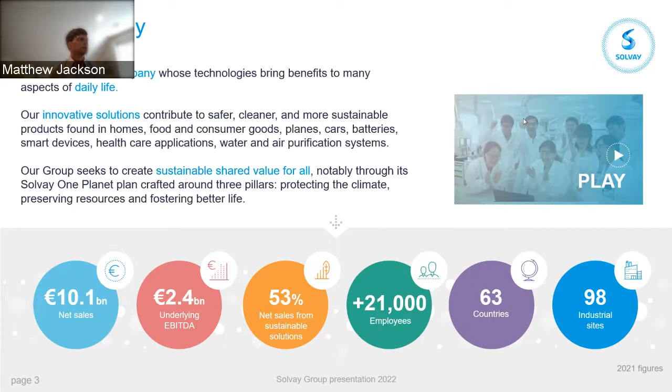And then, what are some of the areas that we're interested in? Solvay as a company, we're interested in aligning ourselves with a lot of the trends that are driving global interest. So things like electrification, lightweighting, resource efficiency. Solvay in itself has a lot of different material businesses and segments. Today, we're looking at composites specifically.

Our composites specifically help enable electrification, as the weight you add to a structure increases significantly when you add batteries. So lightweighting becomes really important and actually goes hand in hand with electrification. Then there's resource efficiency, which is driving our interest and focus as we develop composite materials. How can we develop materials that are more sustainable, that use less energy to manufacture, and down the road use less energy in the actual lifespan of the material?

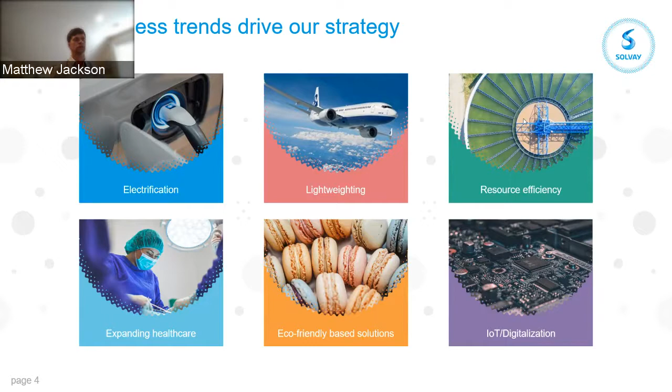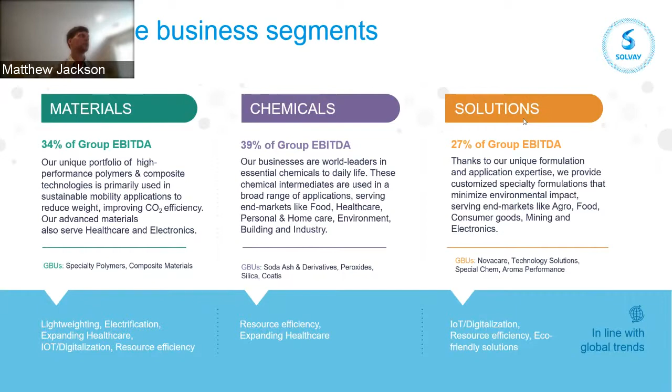So again, the three business segments of Solvay: we have the materials segment, which is where we are with composite materials, the chemical group, and the solution group. I'm not going to talk about the other two today, but it's really about a third, a third, and a third of the different segments. I'm going to talk primarily about the materials group today, which is around 34% of our group EBITDA. Within the materials group, we have our specialty polymers and our composite materials.

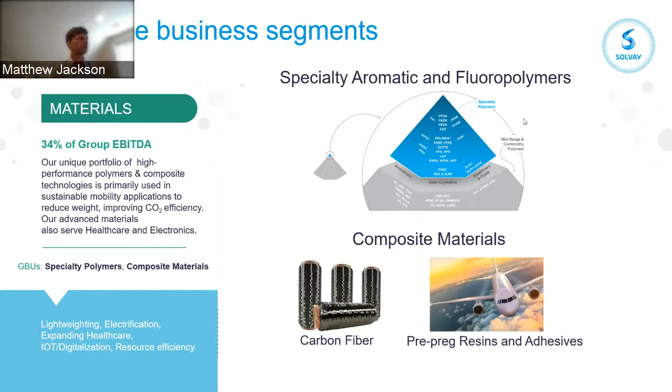The focus for Solvay in particular is on high performance. For both our specialty polymers and composite materials, we tend to sit at the top of the performance pyramid. The top image shows some of the polymers we make in our specialty polymers portfolio, things like highly aromatic polymers such as PEEK, PEKK, and PPS. We also have a wide portfolio of fluorinated polymers and fluorinated materials. So specialty polymers sit at the top of the performance pyramid. And with composites, they also tend to sit at the top of the performance pyramid when we look at just structural materials. Those two businesses make up our materials segment for Solvay.

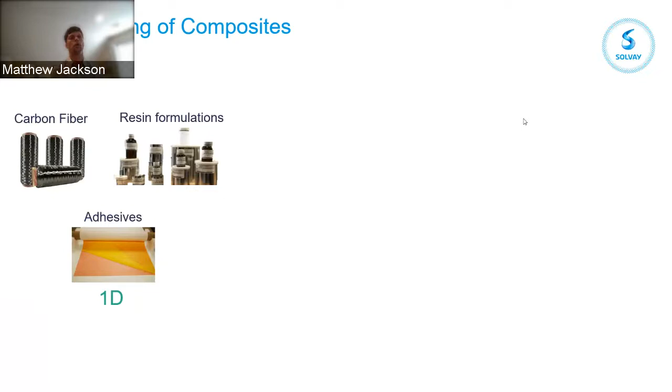I'm going to get into a couple different areas of composite manufacturing today. But I just want to touch on and show that manufacturing of composites covers many different areas. The first is the one-dimensional product form, things like the carbon fiber or reinforcement itself, and then the polymers and adhesives that go to hold the carbon fiber together to give it structure.

We also then have the manufacturing of what we call the prepreg, which is an impregnated carbon fiber. We take the polymers, the resins, and combine them in different ways to create this two-dimensional structure we call prepreg, which then goes to our manufacturers.

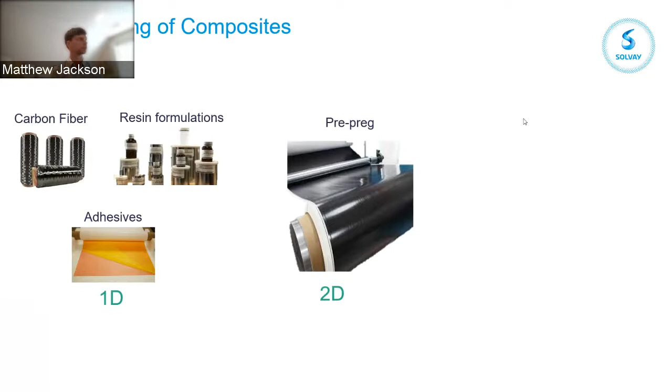And then finally, there's the manufacturing of the parts. The parts take a three-dimensional form and tend to carry load. So there's manufacturing at each stage: manufacturing of the individual constituents, manufacturing of the quote-unquote composite where we bring the constituents together, and manufacturing of the part. Today's talk will touch on manufacturing at each of these stages - not a deep dive into any one in particular, but showing how we go from manufacturing the constituents all the way to manufacturing the part.

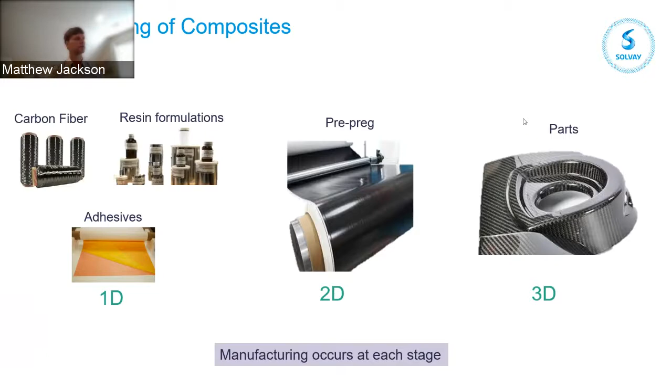Before we get too far along, I did want to define what a composite is. The word composite is fairly generic - it can mean made up of several different constituents or components. We're interested mostly in an aerospace definition. From aerospace, we're talking about a reinforcement fiber combined with a polymer matrix, looking to maximize performance.

Carbon fiber was actually first invented in 1879, so a long time ago, but wasn't actually commercialized until 1959. So when we talk about carbon fiber structures and the legacy and experience with using these materials as structural materials, it actually isn't that long. If you compare it to metals, carbon fibers and their composites are relatively new on the scene when we look at them for structural materials.

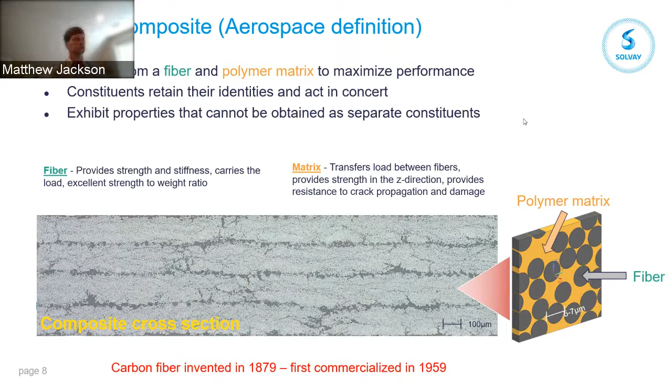When we talk about a structural composite, we're talking about how to combine the fiber and resin to maximize performance. What's really important is to get the ratio of fiber and resin correct. Ideally, if you want to maximize performance, you want as much fiber volume as possible. But that often comes at the sacrifice of manufacturing and processability. We need a system without voids, where the polymer can infiltrate and help transfer load without acting as a defect. So there's generally a balance, and we tend to target around 50 to 60% volume fraction of carbon fiber to get the best balance of properties.

If you look at the generic stress-strain curve of the different constituents, you can see the fiber, the reinforcement, has really high modulus and really high strength. The polymer resin, which goes around that, tends to have a much lower modulus and a much lower strength. Ideally, we want to combine these two in a form which maximizes the performance of the structure.

There are different ways to do that. We can have the fibers run all in one direction - we call this a unidirectional system. You get a lot of strength in the direction of the fibers, but you tend to be pretty weak in directions that are perpendicular or orthogonal to the fibers.

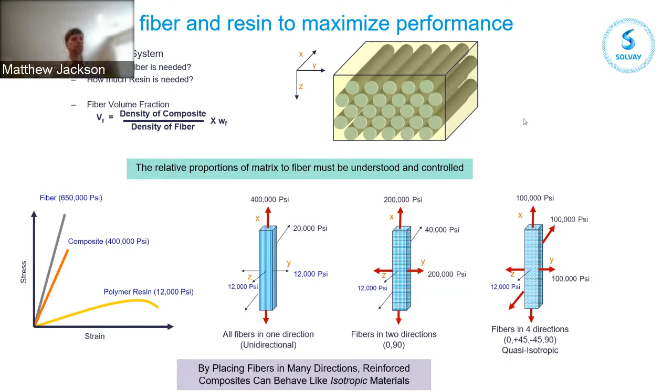Generally, what we do with composite materials is try to get into what we call a quasi-isotropic or isotropic-like material. Ultimately, we want to maximize performance in every direction, and we do that with this quasi-isotropic layup - having fiber in as many directions as possible. You see we've again sacrificed performance in the X direction, but now we've given it strength and stiffness in both the X and Y directions.

When we design an aerospace composite, we take this building block approach. If we start with a single lamina, shown on the left, that's a single layer of unidirectional carbon fiber with the matrix. We then build up structures to give it both a Z direction dimension and stiffness and strength in multiple directions. This gets into some of the nomenclature we use.

We call a single ply with all the fibers running in one direction a lamina. Once we start stacking these lamina together, we get what we call a laminate. In the center, we're showing a 6-ply unidirectional laminate. Here we have strength and stiffness really in one direction, the direction of the fibers, but not much in the transverse or shear directions.

To overcome this, what we tend to do are again these quasi-isotropic laminates. One thing I'll point out is we try to have a balanced layup - by balanced, I mean there's going to be symmetry. If you look at the orientation of the plies on the right-hand image, we go from 0, minus 45, plus 45, to 90, then 90, plus 45, minus 45, and 0. So we have a mirror plane in the middle.

That's to try to create as balanced a layup as possible and to maximize performance in every direction. So the fibers give us strength really in one direction, and we try to balance that out by creating these quasi-isotropic laminates, which gives us multiple directions of performance.

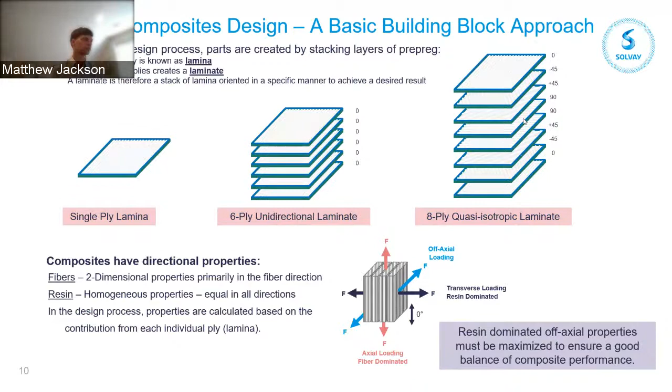Really the idea is to identify where the loads are, how the loads travel, and try to align the carbon fiber such that it follows the load path as best as possible. A lot of times the actual geometry and the load that the structure is under dictates the layup, dictates the angles, and dictates the number of plies that we see in a structure.

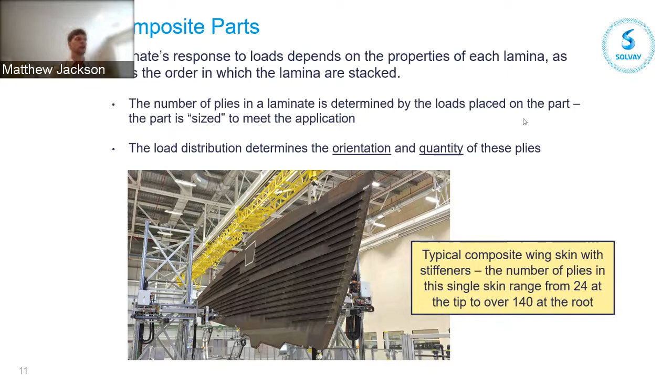Getting a little more into the basics - when we talk about a composite structure, we're talking about a fiber reinforced polymer, and the fiber is really what gives it its strength and stiffness.

If you look at different reinforcing fibers, there are a lot that are used. Glass fiber and carbon fiber are the two most prevalent, by volume or by mass. When we talk about carbon fibers, we're typically talking about PAN-based or polyacrylonitrile-based carbon fibers. The reason is because they give the highest strength and modulus combination and a fairly low density. If we look at the density compared to glass fiber, our density is quite a bit lower and our strength is quite a bit higher.

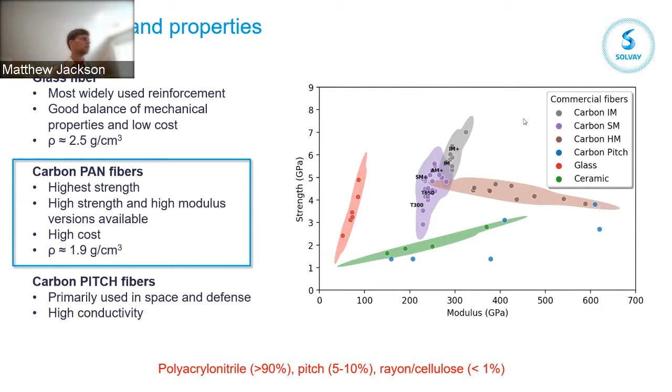Within the carbon fiber realm, there are different types of carbon fiber. There's the PAN-based, which I just mentioned, then there's also pitch-based carbon fibers, and you also see a little bit of these rayon and cellulose type fibers. Even within these domains, PAN-based carbon fibers make up over 90% of all carbon fibers used. Pitch, rayon, and cellulose have niche areas, but for the most part, polyacrylonitrile-based carbon fibers are the bulk of the carbon fiber composites used today.

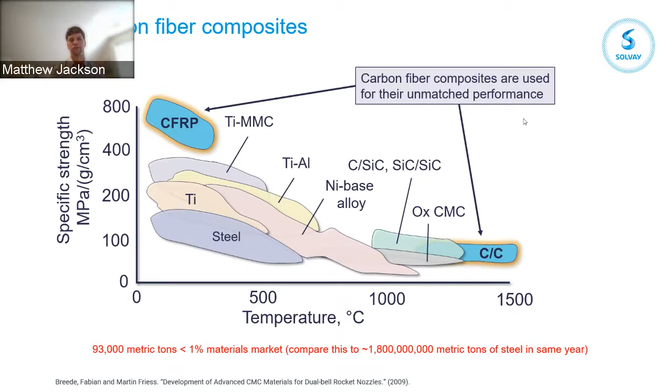So why are composites used? We talked a little bit about the main pros so far. The structural performance you get from these materials is very high, and the weight savings you get. The strength per mass, or strength per density, is really the highest of any commercial material that we have now.

There's some other advantages too. There's fatigue resistance from these materials that you don't get in metals, and there's a lot of corrosion resistance. This is why it's found a home mainly in the aerospace world. Things like fatigue and corrosion are really important, and composites offer some inherent advantages there.

There are some disadvantages though of composite materials, and they are prevalent. One of the big disadvantages is cost. Carbon fiber materials are inherently expensive, and it's not only the cost of the material itself, but also the cost of manufacturing with this material. The manufacturing process is unique and sometimes cumbersome, so manufacturability becomes a challenge with composite materials as well.

Things like repairability are a market that isn't as mature as metals. If there is damage, is it something that can be repaired easily and effectively? There's a big area of research right now in the repairability of composites, but it's still considered more or less a disadvantage until the technology matures a little bit further.

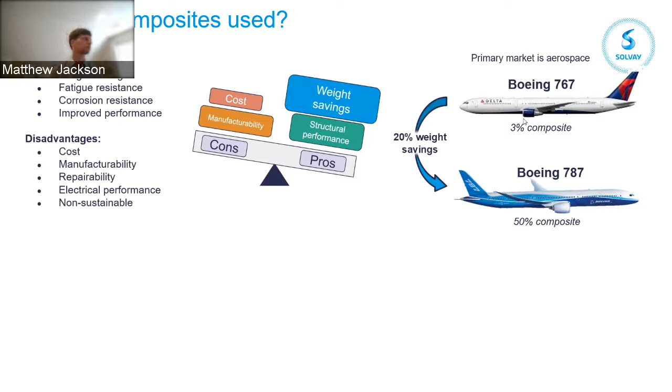So where else are composites used? It really found its home in aerospace, and that's where a lot of this technology was developed. But there's a lot of areas now where it's being explored and applied just because of its advantages in weight savings and structural performance.

Urban air mobility is one of the most obvious—things like air taxis and drones, vehicles that are small, lightweight, and mobile that fly. If you're carrying cargo or people, structural performance and weight is really critical for these structures, especially if they're going to be electrified. If we're adding batteries to these structures, which inherently have a lot of weight and mass, composite materials for the structural components make a lot of sense, and a lot of times are what actually enables this technology to be developed.

Wind energy is also another big area. As these wind blades get bigger and bigger, the structural requirements for the blades and for the materials themselves become higher and higher. A lot of blades have been made with glass fibers in the past, but now as these things get bigger and the loads on them higher, carbon fiber is becoming the preferred material for these wind blades.

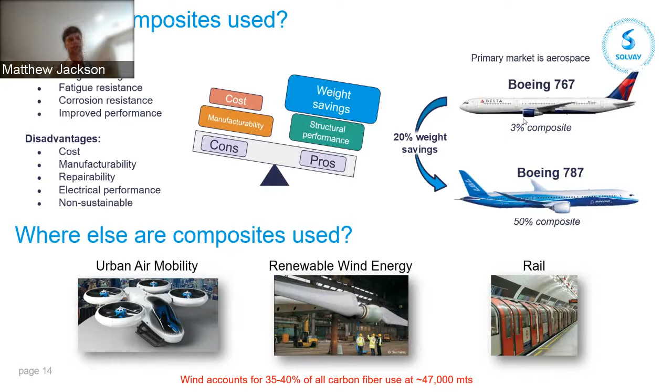And then finally, rail. Rail has a lot of the same advantages as the other transport mechanisms—really, you just need less energy if you have less mass. A lot of the rail structure now is being explored to be composite, just for energy savings and efficiency reasons. At the end of the day, wind still dominates carbon fiber usage—that's the biggest market by volume, and it's looking to grow, but some of these other areas are looking to grow substantially in the future as well.

So I'm going to talk a little bit now—we're starting to get into the manufacturing, and I'm going to talk about the manufacturing of the carbon fiber itself, because it's the most important component in the composite, as that's what gives it its unique properties. I mentioned before there are a couple different carbon fiber types: there's pitch, there's rayon and cellulose, but pan-based makes over 90% of all carbon fiber used. So I'm just going to walk through the pan-based carbon fiber manufacturing method.

It's a fairly complex process. If you've ever had the privilege to walk through a carbon fiber manufacturing line, it's quite impressive how big these are. If you ever get a chance, I'd recommend you take the opportunity to do it.

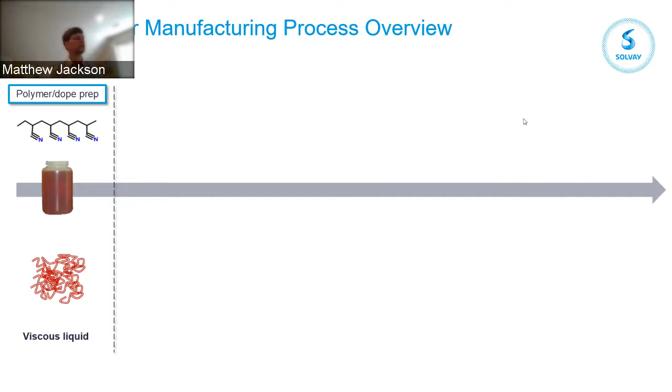But really, we start by making a polymer. So we start at the simplest stage, even before what I show on the screen here, with acrylonitrile, which is the monomer. We polymerize the acrylonitrile into polyacrylonitrile, and then we dissolve it in a solvent. When we dissolve it, we call this system a dope—it's a polymer dissolved, and it kind of looks like a honey texture. At this point, we have really a viscous liquid.

We take the viscous liquid and perform a process we call spinning. You basically take the viscous liquid and force it through tiny holes, tiny little spinnerets, to create fiber that we see here, called white fiber. Once we get to the white fiber stage, we wash out and remove all of the solvent, and we get to just polymer. At this stage, we start to develop some crystalline structure within the material. We do stretch it to give it some mechanical performance and properties. This is really what we call, and people refer to as, the precursor.

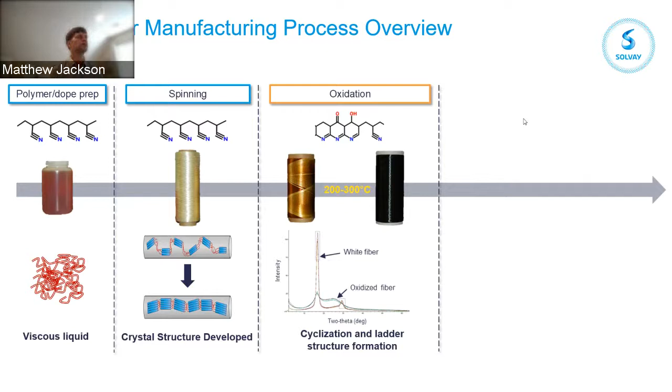After we have the white fiber, it goes through a stage we refer to as oxidation or stabilization. Up to this point, we haven't done much chemistry on the polyacrylonitrile, but now we start to do chemistry on the backbone. This is the most important part, the stabilization or oxidation stage. It allows us to cross-link the structure, giving it some mechanical integrity, but also thermal integrity. Ultimately, we want to take it where we drive off the heteroatoms, to carbonization, but in order to do that, we have to cross-link the system first so it doesn't melt.

Pan is unique in that the temperature at which these cyclization or cross-linking reactions happen is lower than the melting point. A lot of polymers, even those with high aromatic or carbon content, have the fatal flaw of melting before these reactions occur. If you have a fiber under tension that melts in your oven, you no longer have a continuous fiber. So pan is really unique in that sense, and it's why, even though it was developed around 50 years ago, it's still the primary and prevalent technology used for carbon fiber development today.

You can start to see some of the color change—this is associated with the chemistry we're doing on the structure. We go from the white fiber to a kind of golden orange fiber, all the way to black fiber once it's done through the oxidation phase. At the bottom, you can see some of the structure we're starting to develop, going from just aligning the crystals within the pan to actually forming cross-links, developing some early cyclization and some later structure formation in the fiber.

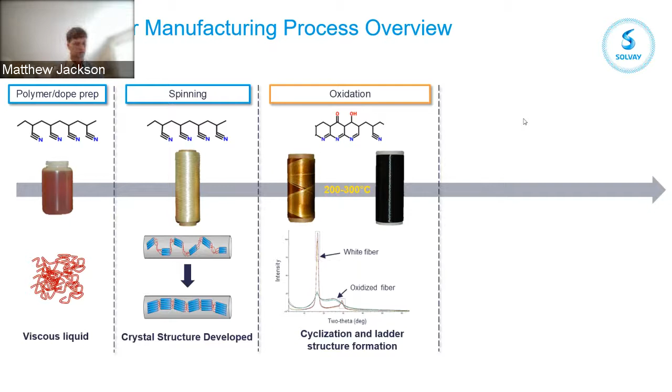The last stage then is to drive it to the carbon fiber. We define carbon fiber as having more than 93% carbon, and at this stage we're really trying to drive off all, or most, of the heteroatoms. We'll still have some residual nitrogen and oxygen in the structure, but for the most part we drive those off as much as possible.

The temperature we go to in the carbonization really dictates how many of those heteroatoms remain. If we want to take that carbon structure to even higher percentages, we take it to a higher temperature, but a lot of times that comes at a sacrifice of strength. So there's really a balance between strength and modulus within this range, 1,000 to 2,000 degrees Celsius. Depending on the specific grade of carbon fiber you want, you'll heat it to different temperatures and stretch it to different degrees.

At the end of the day, we end up with a structure that has some amorphous carbon content and some crystalline content, and we can vary that ratio depending on the type of properties we want to target.

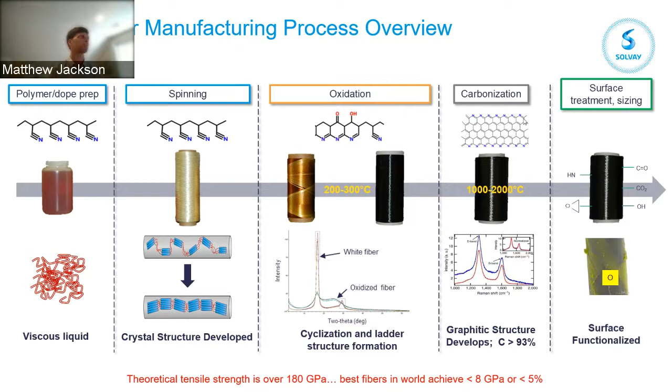In order to get into a product form that we can send to our customers, we have to decide what to do with the carbon fiber itself. There are two ways you can really align the carbon fiber. The first I'm going to talk about is the fabric form, which is what most people associate with carbon fiber.

If you looked at something like a carbon fiber hood or a carbon fiber bike, a lot of times this fabric form and geometry is shown off, and that's what people associate with it. There are some advantages of fabric form. To get the fabric form, we basically take it through a weaving process, typical to what you'd see with other fibers and fabrics. But the advantage of fabric is mostly in the drapeability - it allows you to conform the material to fairly complex shapes depending on the part you want to manufacture.

It also has structural efficiency - one ply inherently has fibers running in multiple directions, so there's less effort to balance out the fiber direction because it's just inherent in the fabric form. It's also a fairly cost-effective manufacturing process, partly due to this efficiency. If it's a manual process you're using to make your composite part, there are fewer plies, fewer layers you have to lay down.

There are some disadvantages with the fabric form though, and the biggest is the property knockdown you see with the fiber. Inherently, each carbon fiber tow is going over other carbon fiber tows in the other direction, which creates this fiber crimp in the structure. If you're looking at absolute top-level performance, you can imagine as you put that crimp under either tensile or compressive load, it's not as structurally sound as a unidirectional fiber, which is really a simple beam - you do get a knockdown of properties.

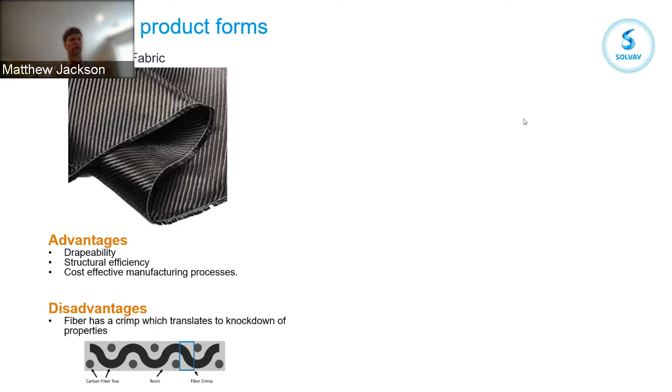Contrast that with the unidirectional product form. This is where the fibers run all in one direction. I talked early on about how we can start to balance the properties, right? So we take these layups and we can rotate the angles of the fibers to give us strength and stiffness in different directions. The advantages of the unidirectional are the high structural properties. This is where we get the highest performance.

But it really comes with the disadvantages of, it's more laborious, more plies are required to get a balanced structure. Again, it takes more work, generally higher cost, which is associated with the higher labor. And then another disadvantage is really the shapes and the geometries that you can conform with the unidirectional. So it does not conform nearly as well as the fabric fiber form.

This works pretty well if you have a fairly flat panel or geometry. But if you had a curved shape like a radome, something like that, you tend to get wrinkles and crinkles, which then inherently jeopardize the high structural properties that you were going for in the first place. So each one has its benefits and disadvantages, and it really dictates on what is the part that you're trying to make, what is the manufacturing method that you're trying to use.

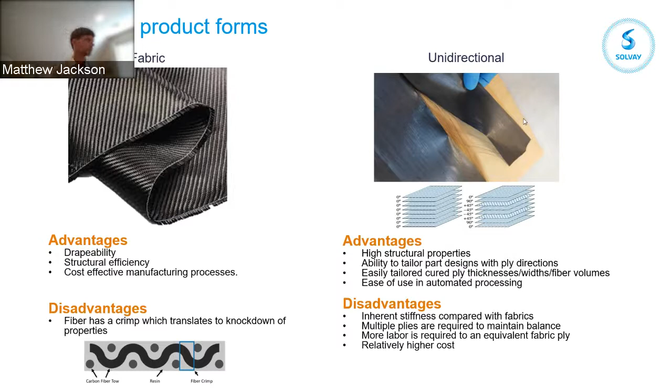So after the carbon fiber is manufactured, what we look to do is manufacture the prepreg, or the impregnated carbon fiber form. We can start with either the dry fabric, or we can start with the unidirectional fibers. For the unidirectional fibers, what we end up doing is taking many different tows or spools and lining them up next to each other. To create a prepreg, we might have anywhere between 50 to 200 spools being unspooled at one time to create a carbon fiber web.

We then take those and spread them out, and then add a polymer matrix to the fibers directly. This can be either a thermoset or thermoplastic matrix. This can be done using hot melt, or using a solvent bath, where we take the polymer of interest, dissolve it in a solvent, and then run the fibers through that. It can also be done with a slurry process, where we take the polymer and grind it up and basically deposit particles on the surface, which then get consolidated later.

There's many different ways to combine the materials, right? It depends on your input material form, whether it's fabric or unidirectional fiber. Then it depends on the type of polymer that you want to combine it with. At the end of the day, we end up with these prepreg forms, which then go to our customer. For Solvay materials, this is kind of our end product, these prepregs, but it is the building block and beginning for the part manufacturers who take the material and then create it into a part.

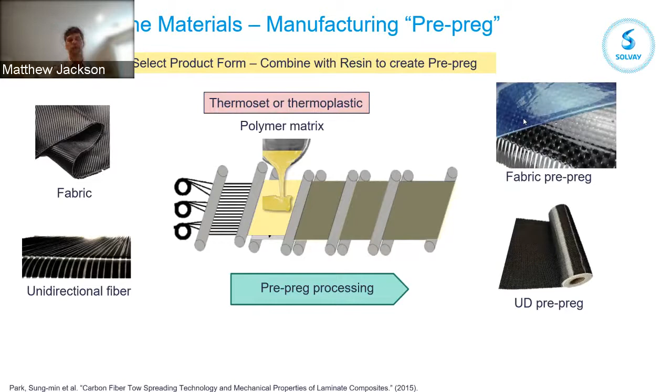The manufacturing of composite parts takes the material I just talked about and begins to conform it to different geometries and dimensions. This picture here is showing an automated process where we're taking the carbon fiber, highlighted in red, and draping it over a fuselage mold. This is actually done with unidirectional carbon fiber. You see the geometry has a slight contour, but not something so extreme where we would need fabric.

In aerospace, a lot of times we're looking for maximum performance, especially if it's something like a fuselage. So here we take the impregnated carbon fiber, and we lay it in different directions depending on the load paths that the material is going to see. We lay it down, or our customers lay it down, in the pre-impregnated form, before it's been cured, allowing it to conform to the geometry. Then they'll put it into an autoclave or an oven, run it through a temperature pressure cycle to cure and basically set up the geometry.

Composite parts are somewhat unique in the sense that the manufacturing of the part and the materials happen at the same time. It's not really a composite material until it's cured and the stiffness goes up and it retains its shape. So we make the part and the material really at the same time. Our job as a material supplier is to provide the material that allows them to do this.

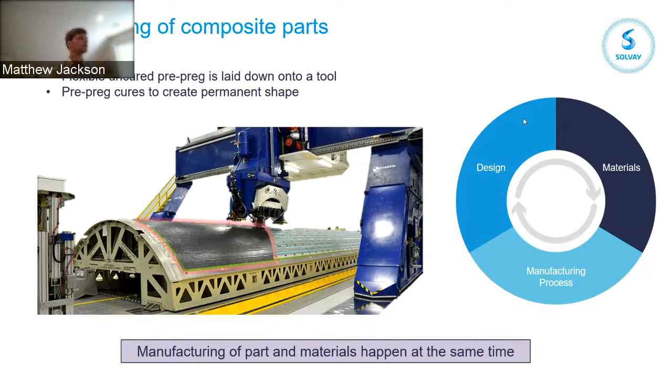So there are some effects of the prepreg manufacturing process on performance. Before, I talked about just the layup, so we can vary the angle of the composite lamina itself to give variety of strength and stiffness in different directions. But when we talk about the manufacturing of the prepreg itself, it can actually create some variability within the microstructure, which has effects on the performance.

The best case scenario is a completely consistent, homogeneous material, but that's sometimes hard to achieve. Depending on whether we do melt impregnation, whether we're using unidirectional versus fabric, whether we're using solvent impregnation, the rates and temperatures we use can change the variability we see within the fiber spacing in the composite.

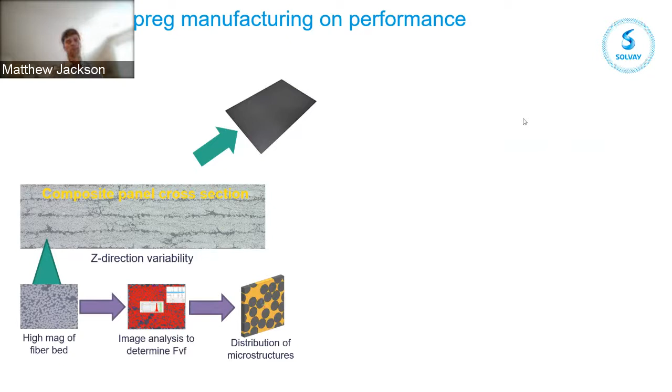We can also take a top-down look at the same material and get different information. Now we're not just looking at the spacing in the cross-section, but the actual distribution of angles that we see from the fibers, which are inherent to the manufacturing process. Each manufacturing process for the prepreg has a slightly different effect on this behavior. Now we're talking about distributions of fiber angles that vary from whatever angle we want to set it at.

If we're trying to target a 0-degree ply, the manufacturing method can have up to plus or minus 4-degree distribution of that fiber angle. So essentially, the manufacturing method can be chosen to try to minimize or expand that. A lot of times, if we're looking at low-cost manufacturing, high rate, the trade-off is higher variability, so we get a higher distribution of these fiber angles.

As we deviate more from 0, we tend to get a bigger hit in our properties. If we can go slow and steady, we can reduce this distribution, but a lot of times that comes at the sacrifice of a slower process and ultimately a higher cost material. So again, it's all a balance, but manufacturing at different stages of composites can have an effect on the property and behavior.

One of the things we can do to try to understand this is start to bring in simulation. This is showing how we can do coupon simulations where we take the information from the composite panel cross section to develop a distribution of microstructures. We can take the information from the distribution of fiber angles, showing how the manufacturing process disrupted us and pushed us away from this ideal state. So we can get this rotation of microstructures and start to run these predictive simulations.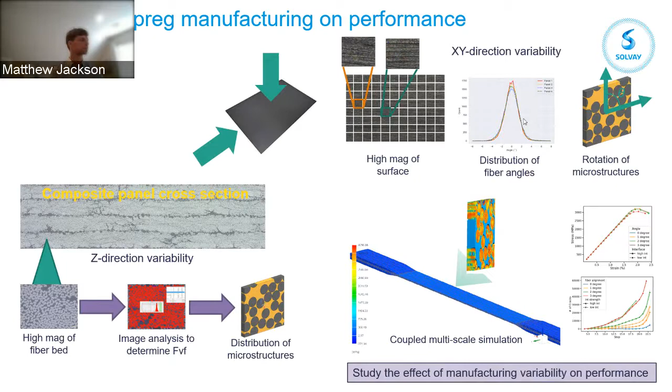When we look at the polymer matrix, so we talked about the fiber, we talked about bringing them together in the prepregging process. This is really just getting into the different types of polymer matrix that we can use within a composite.

I would say for the most part, thermosets are most widely used. It's around 75% of the market. Polyester and epoxy are most widely used. Epoxy tends to be for more of the high performance, with polyester being kind of more of the lower cost option. But when we look at thermoset systems, we're looking at melt and solvent impregnation primarily.

Again, both unidirectional and fabric form. These are typically cured by heat, although sometimes we can use an external stimuli or catalyst where we can even get room temperature cure. But for the most part, we'll take our thermoset, impregnate it into our fiber, and then heat it up to set the shape and perform the chemistry. After the crosslink happens with a thermoset, you are basically locking into a permanent shape.

So looking at the chemistries, these are the chemistries provided by Solvay. These are the chemistries that we work on. There is a bigger list out there, but for the most part, this is probably 90%, 95% of all the commercially available systems.

So epoxy makes up the biggest market. That's what people are familiar with. It has a great performance and a great history. Things like bismaleimide and cyanate esters are fairly unique for high temperatures, as well as polyimides. And then the acrylates and phenolics are more for kind of lower cost industrial applications.

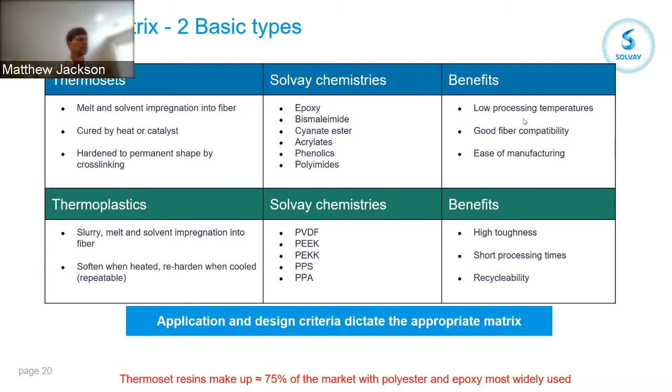When we talk about designing with composites now, it gets a little more complex. What we try to do is replace metal in as many applications as we can, and a lot of times our customers are looking to do the same thing. It gives them weight savings and a lot of times efficiency. So really, the first iteration, if somebody says, I want to use a composite part or I want to look at replacing metal with composite, the first thing we do is say, well, would any current materials work.

Is there anything off the shelf that will fit my application right now? If the answer is yes, that's great. If the answer is no, then we go through this iteration cycle again.

Iteration number two: will small modifications suffice? Maybe you need a lower processing temperature to fit into your system, or a lower cost, or something different from a current material, and so you can do some small iterations.

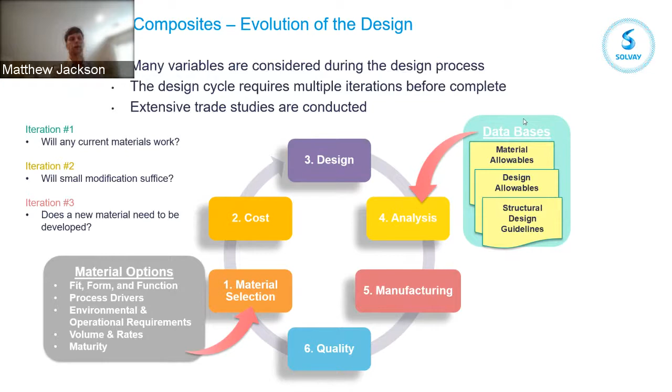Iteration three is really developing a new material. When we do this, the first thing we go through is material selection. What do we need to do to solve the problem and fit into the customer's manufacturing process? Then you look at things like cost, design, analysis, manufacturing, and quality. We go through each of these stages to find the right material for the right form, taking into account a lot of the considerations I talked about previously.

A big part of composite materials, as I mentioned before, is the overall cost, and that's one of the downfalls of composites. When we talk about the cost of using composite, the material cost only makes up about 25% of the total part cost. The customer has a lot of other costs that aren't always reflected by just the material cost, things like labor cost, processing cost, material handling, quality, and inspection. So us as a material supplier are trying to develop and innovate ways to reduce that for our customers.

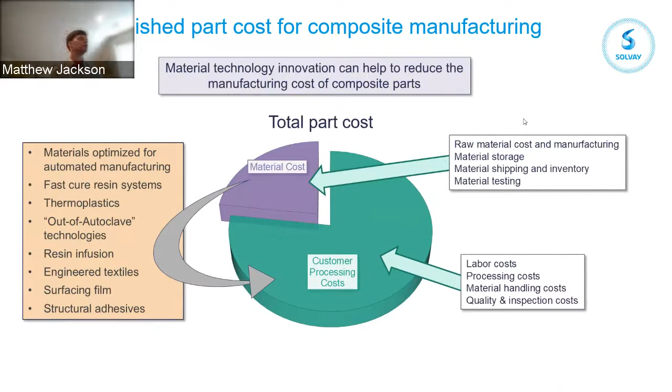That brings down the overall cost of a composite part—things like engineered textiles, out of autoclave technology, so the capital investment for our customers is significantly less. It's also looking at fast cure and thermoplastic systems, which have a shorter processing time, meaning higher throughput for our customers.

Part fabrication ties into the last slide I talked about. Why is the processing so expensive? You have to go through all these different steps. When our customers receive the material, they have to store it at cold temperatures—this is for a thermoset. They have to go through the cutting and kitting stage, where you unroll the material, cut it into different forms and geometries, and lay that up into your composite panel. You then cure it, cut it, inspect it, and assemble it by combining with other parts.

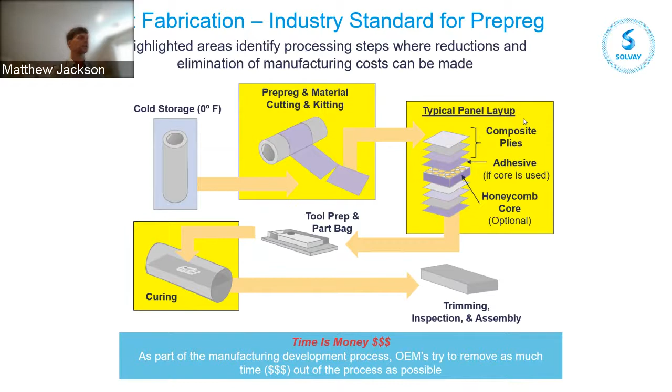At the end of the day, time is money, and all of these steps take time. So what we try to do is develop technology to help automate these steps, or help so the material itself is not the time limiting step. The yellow boxes show where we, and others, are developing technology to automate and make these steps less labor intensive, and also less costly for customers and part manufacturers.

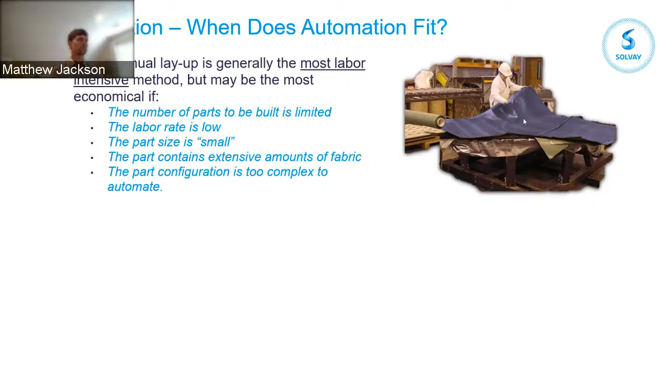Automation is something that could significantly help with the cost if it makes sense. So when does automation fit? Hand layup is probably the most common form still used today, but it's by far the most labor intensive, and the cost of this manual process can be quite high. It can still make sense sometimes if the number of parts is small, if the labor rate is low, and if the part size is fairly small. Otherwise, it starts to become more cost effective and smarter to use automated processes.

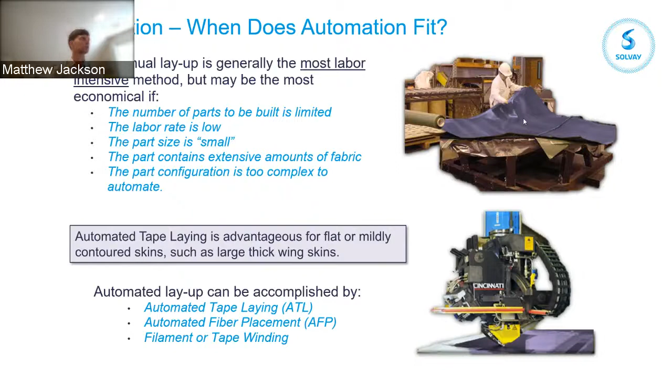For part fabrication, since we're getting close to the top of the hour, I won't spend too much time on these, but we can use simulation to help with some of the downstream manufacturing. Again, this is where we work together with customers to try to define the best material for their function. If you look at more complex shapes, it's not always as easy and obvious as laying up a flat panel.

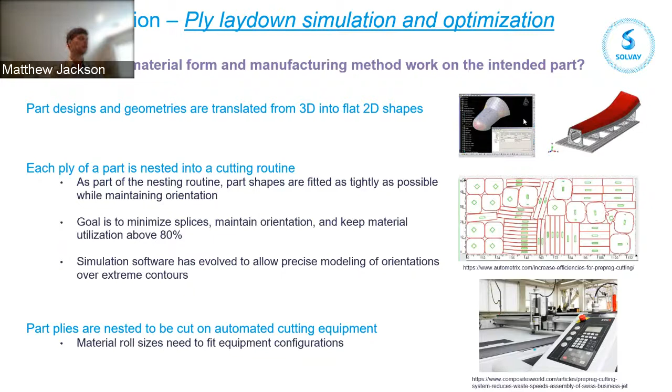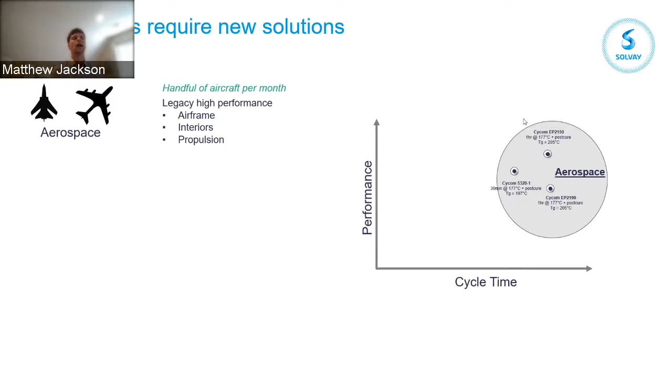When we look at new markets, aerospace is primarily where composites have had a foothold. We're talking about high performance but high cycle times. Automotive is where everybody wants to get to, but the challenge with automotive is the cycle times and the number of parts you have to make in a given time. We go from aircraft, which are a handful per month, to automotive, which is tens of thousands of vehicles a month, so the cycle time has to go down significantly. This has always been a challenge. We, as well as other composite material manufacturers, are looking at reducing cycle time significantly, but that's still one of the biggest challenges in automotive.

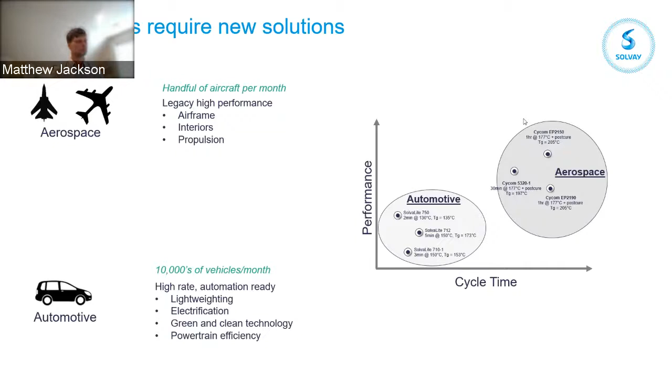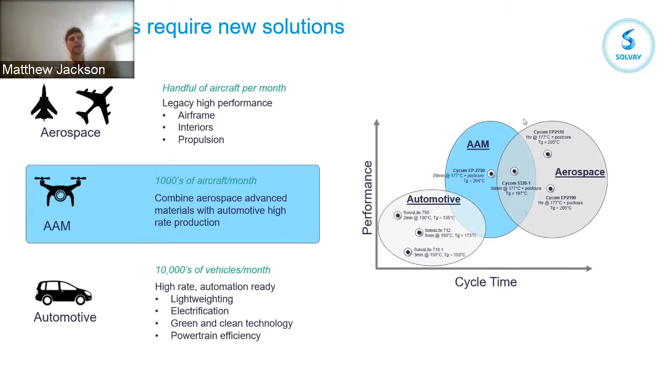More recently, some new challenges have emerged, things like AAM, drones, aerial mobility vehicles. It's kind of combining both worlds - here we still have a high rate of crafts being generated, thousands a month, but because they fly, they still need aerospace performance. This shows some of the new challenges we have with composite materials going forward, and some of the things we can do to anticipate that and provide people with the right materials they need to make composite structures.

And I realize we don't have much time, but happy to take and field any questions that anyone might have.

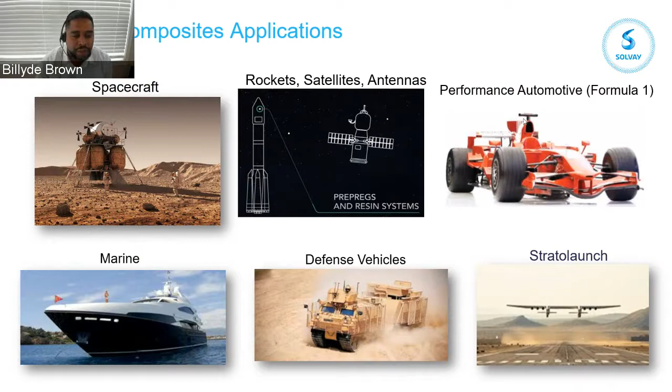3D printing is a bit of a challenge. We find that the product form of the actual fiber itself needs to be different than we typically use. A lot of times you're looking at lower fiber count, things like 1K, 3K - it's hard to handle like a 50K, which we would use for impregnation. Also, fiber distortion can sometimes be higher with 3D printing, so we don't necessarily get the same kind of consistency as with traditional processing. But it is an area that's growing and that we need to understand better. I think some of our models right now struggle a little bit getting that fiber variation we see with 3D printing, if we're talking about continuous fiber 3D printing, but it's an area we're trying to investigate more and more.

Thank you, that's a great answer, particularly from a materials perspective. I think some of your customers could maybe address more of the repairability part, like scarf repair and that type of thing — things that happen after the part is manufactured.

I had a quick question related to manufacturing as well. For automated fiber placement or automated tape layup — automated processes that work with unidirectional fabric forms — does that help reduce the labor? Is that taking over that manual labor process when it comes to manufacturing, or what are some of the advantages and disadvantages of that?

It depends on the geometry of the part. If you have a lot of complex internal corners, sometimes the automated processes just don't work well for that. If the geometry allows for it, you can save a lot of labor and time by going through the automated process. But it depends on the geometry you have, and it's also going to be more capital intensive up front.

Some of these ATL heads, these tape laying heads, can be pretty expensive, so it depends on the size of the part manufacturer and whether they can accommodate that initial capital investment. But those are probably the two main considerations — if you can use it, it can significantly reduce time and labor.